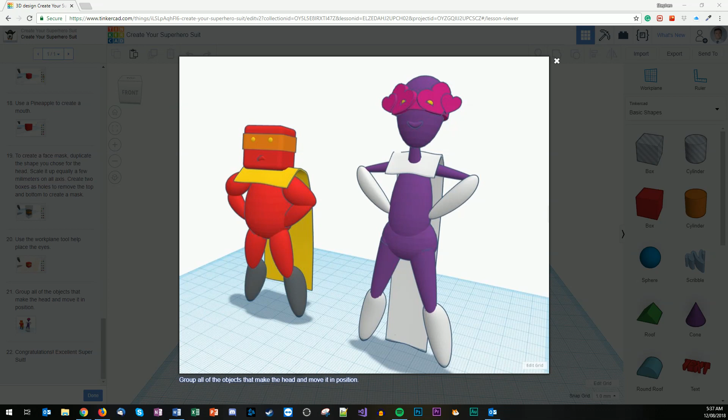Hello, true believer. Today we're going to go through how to build your own little superhero in TinkerCad. This tutorial is taken obviously from up here, and here we go. So that's what it should look like at the end, and that's sort of the characters that I've made up there. So let's begin.

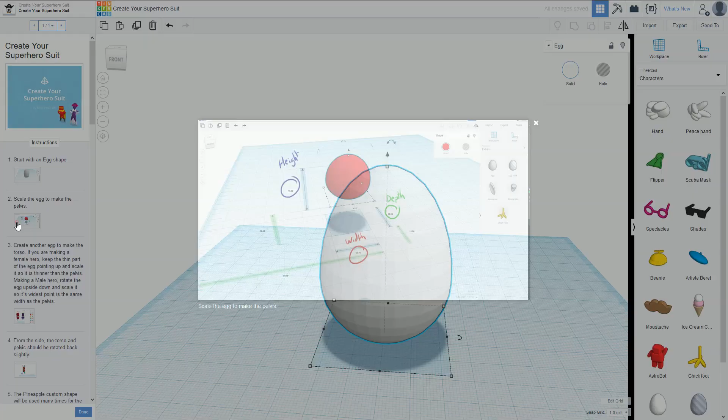So first thing, let's make that full screen, and we'll begin. So the first step that we need to do is place an egg. So up here under basic shapes, we go to characters, down to egg, and we place them down. Then we want to have the dimensions. It says 18 high, 14 deep, 20 wide.

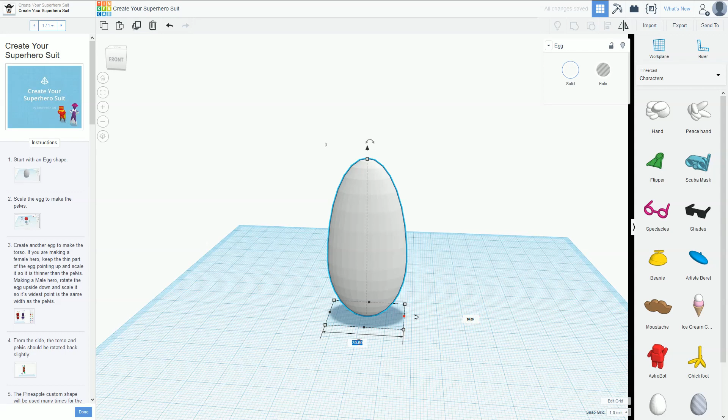So we'll swap that around. 20 there. So it was 14 deep, wasn't it? And we'll swap that to 20. Not that many. There. Down to 14. And 18 high.

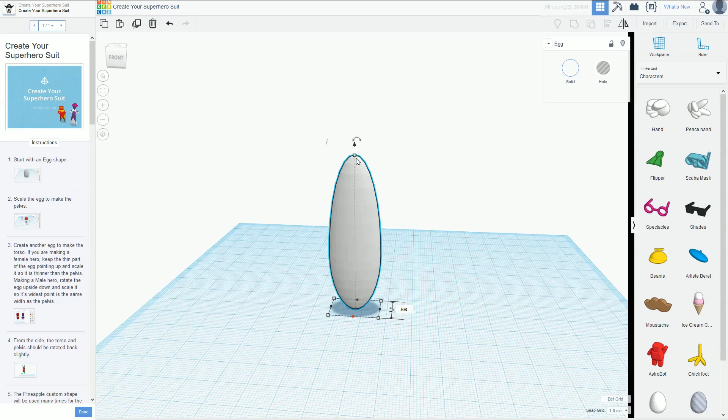And we'll press F. And that looks pretty good. So we've got 20, 18, that way as well, sorry, 18, 14, so let's write that. Fantastic. Okay, so we've got the pelvis made.

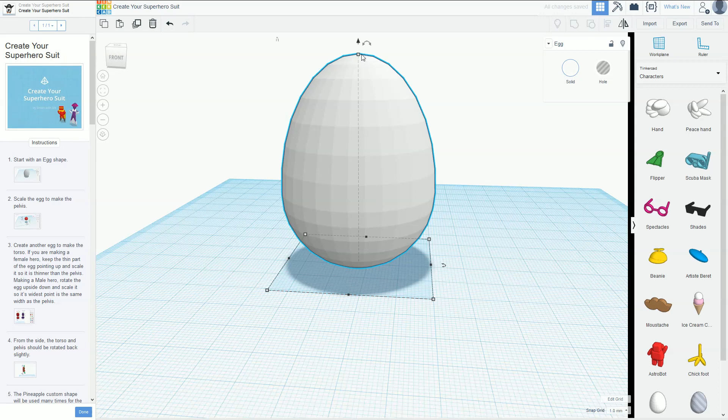So then we're going to create another egg on top of it all. I'm going to make the male torso first, just to get used to it all. And we're going to have an upside down egg about the same sort of width as this. And we're just going to raise it up. So just press Control up, give it a bit of height, and we zoom out, and then we just place another egg on top of it all. And we just need to scale that down so that it's somewhat similar.

So we can cheat here, we'll use the align tool. And we've got that. And then because this is going to be the other way around, we'll just apply it like that. And they want it to be similar-ish width and height. Let's just give them a bit more of a broader shoulder sort of feel. Cool. That looks pretty good.

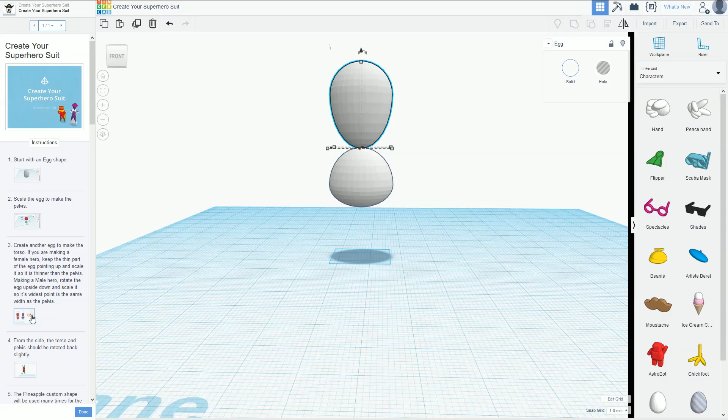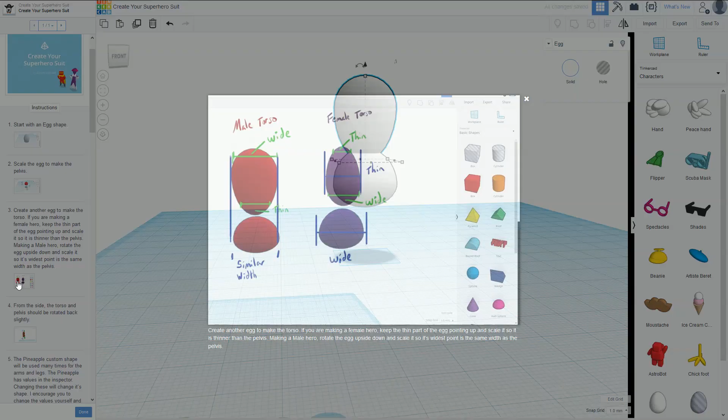Okay, so then the next step is we've got to align it. So let's just go from the side here on the left. And we want to have some sort of curvature in the spine up the back. And then the front should have a little bit more curvature than that as well. So, bring that down. Looks pretty good. Cool. So now we've got our torso sort of built.

So then the next step is we're going to use this pineapple shape. The pineapple shape can be found under all. And right down the bottom, if you go down to page 3, there's the pineapple. Now the pineapple will make more sense when you sort of play around with it. So my hint to you is just playing around with the curvature just so you can see what happens as you move it around. So it gives you this really cool little polygon mesh just to play around with.

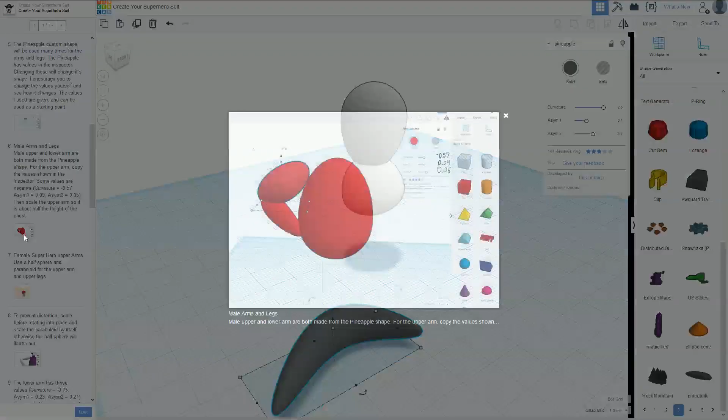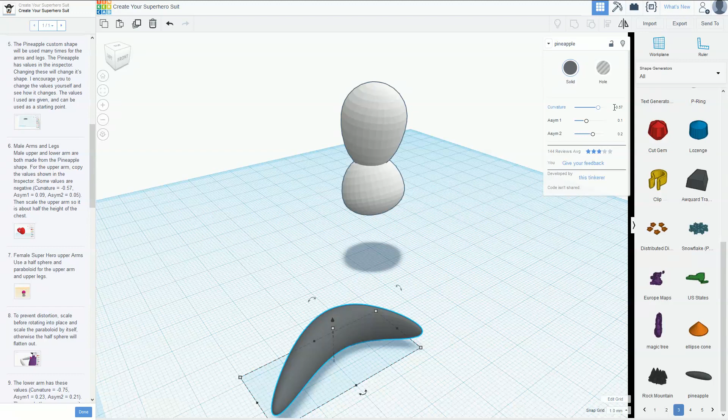If we look at the male arm, they're giving you this sort of shape that they want you to build. So we'll build that first. So we're going to start with the upper part of the arm. And if we read through this, purple for the upper arm, expect these values are negative, curvature 0.57. So we'll go up here, we'll go negative 0.57. The asymmetry is 0.09. Asymmetry is 0.05.

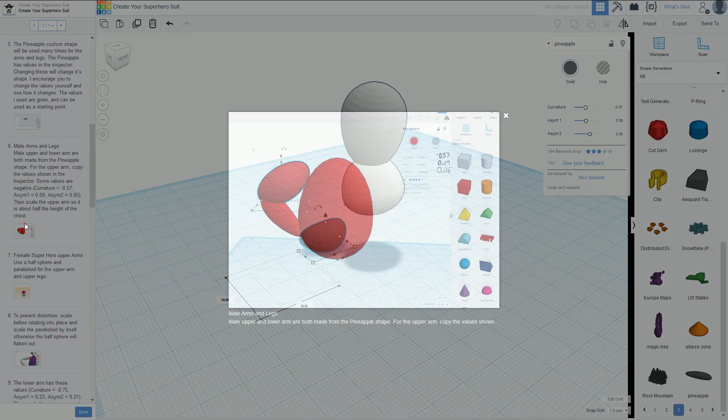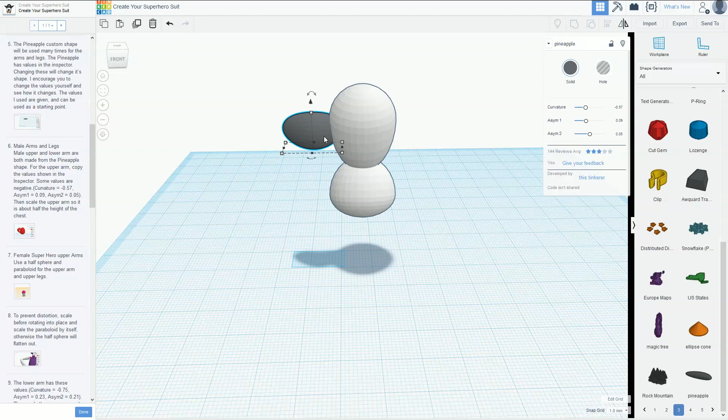And scale the arm so it's about half the height of the chest. So just roughly something like that. Okay. So now we're going to place that up and just line it up to where the top is. So if we cheat, we'll go here, we'll align relative to the top. We could bring that up and bring it up there.

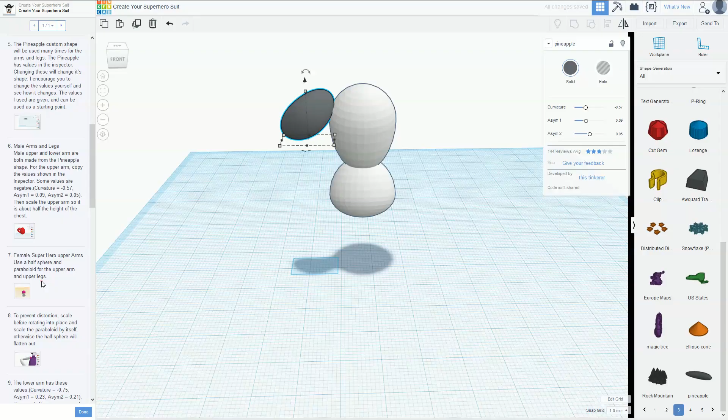And then we're just going to rotate him around. And maybe slightly bring it out the front. That looks pretty good. For this female superhero, we'll cover that later. Let's just keep going with the male one. So now we've got that. Now they want you to duplicate it and then put another one underneath it. I'll make that just a little bit smaller. That way. Whoop.

And we duplicate it. Go down. And we'll rotate him back around. And then we need to change the curvature, so it needs to be a little bit different. So this one's going to be negative 0.75. The asymmetry here, 0.23.

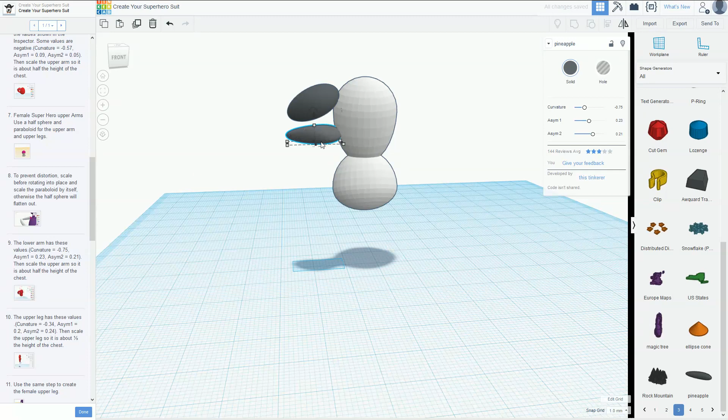And the asymmetry, 0.21. Sensational. Now this is a lot skinnier, so let's just drop that down. And we want that point to be on the other side. Probably something like that.

Cool, maybe a little bit more rotation around. Cool. So that's that side sorted out. Let's just get our Deadpool colors going on. Looks pretty good. Now I might stick him a little bit more in.

So. And just drop that arm back a little bit. Cool. So again, this is sort of an art, not a science. We're just playing around with it until we get it right.

The next step, we've got to do the legs. So we've got the leg going down like that. So let's go the pineapple shape again. Just follow the instructions that they've got there. So we've got the curvature down negative 0.34. The asymmetry at 0.2. And second asymmetry, we got 0.24.

So we've got our sort of leg done. We then want to have the leg on the side here. And we want to have sort of the straight part at the back and the curvature, sort of the quad of the leg up the front there. So if we look at this, we scale that down. Let's rotate that around. Yep, that's looking pretty cool. So I'd say that's the quad on the front.